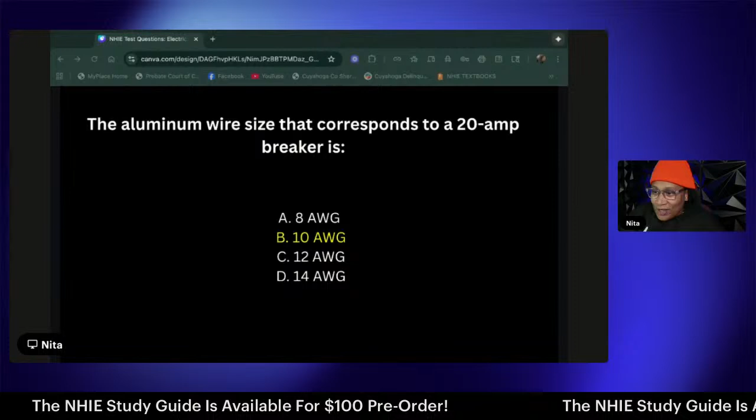First answer, Megan. Correct answer is B. Point to Megan. Everybody got that right, nicely done. All right, next question.

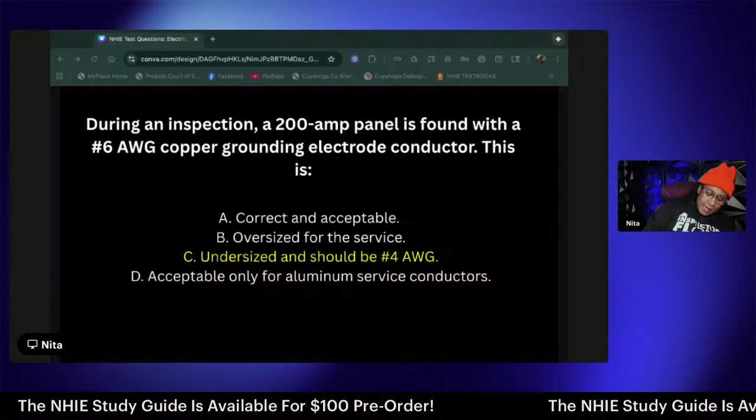First answer, Cola says B, Miss Sims says A, C says C, Megan says A. C, correct answer is C. Point goes to C with the correct answer, C. Tennessee, stand up. All right, next question.

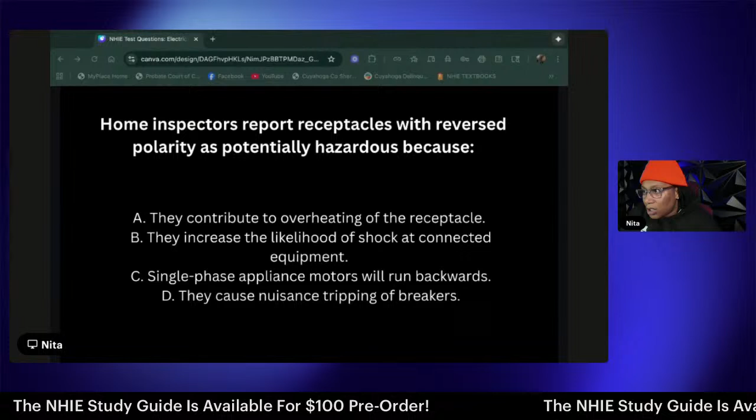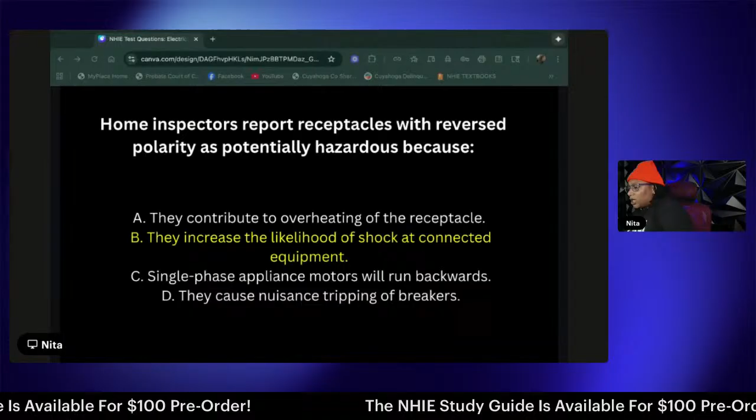First answer was Megan. B, B, B, B, everybody says B. B is the correct answer. That's 3 points for Megan. Next question.

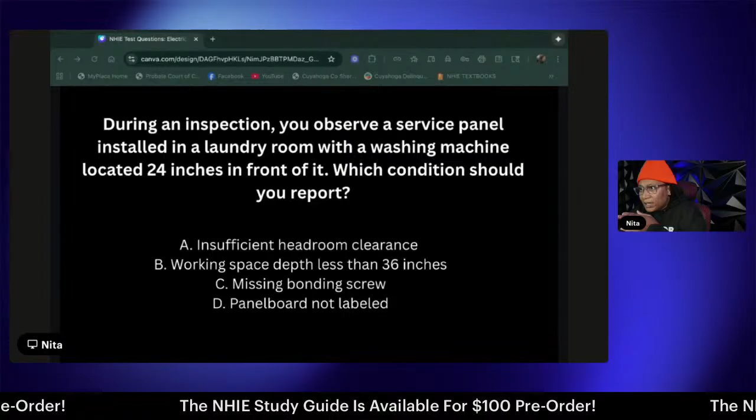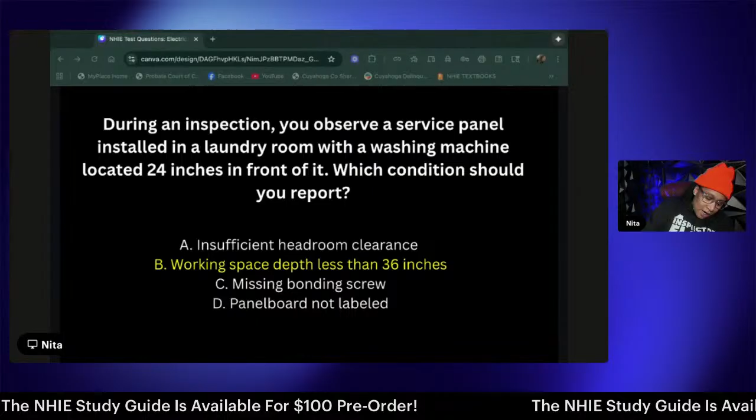First answer C, she says A. Is she correct? C says B, wait yeah. I said A, oh wait, I'm getting confused, let me scroll down. Did you change it? Oh no, A, here it is. Okay, A, and then Cola was second with B. And so the correct answer is B, that's point to Cola. Delaware in the house tonight.

All right, let me see who's last. Okay, Philip last. Next question.

Thank you, Lamont, I appreciate that. First answer, Luis with A. Megan says B, C says A, Dakota says D, Miss Sim says B. The correct answer is B. Has to be within 3 feet of the sink edge.

Point to Megan. Uh-oh, Megan's running away with this thing. That's 4 for the girl in Oregon. All right, next question.

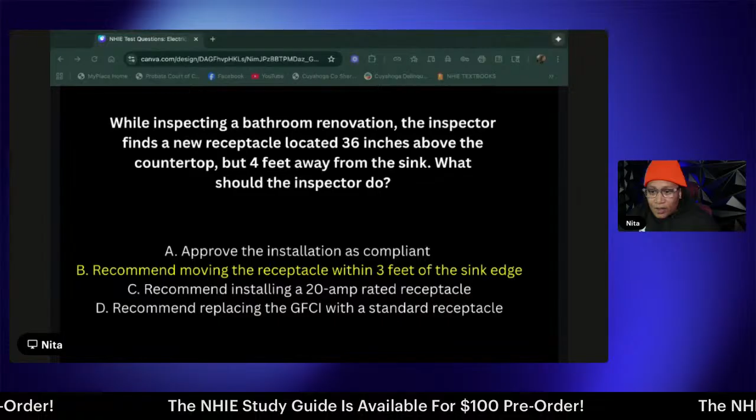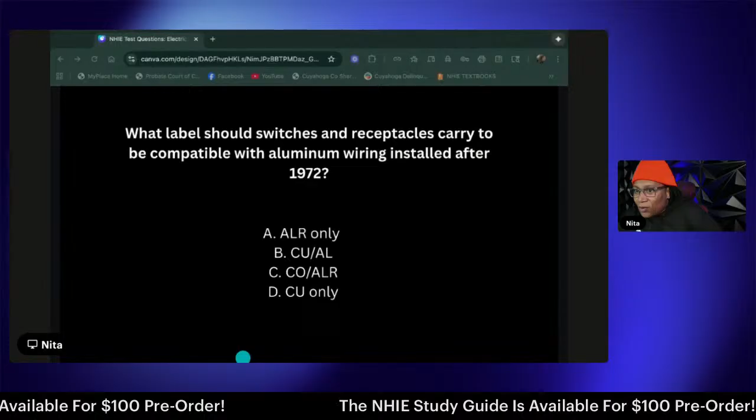First answer, Louise says A. Then Cola says C, Miss Sims says B, C says D, Bree says C. Correct answer is C. Remember, you saw this the other day.

So who does that point go to? C? No, it don't go to me. Who says C first? Oh, my bad, that's Cola. My bad. Cola, okay, okay. All right, next question.

Let me see who was last. I got Megan as the last answer. Next question.

Translate and eliminate. It doesn't do any good to get it done first if it's not right. What are they asking? What can I eliminate?

First answer, Cola. Correct answer is C. Solid strand aluminum versus stranded aluminum. Correct answer C, point goes to C. Every correct answer C get is C.

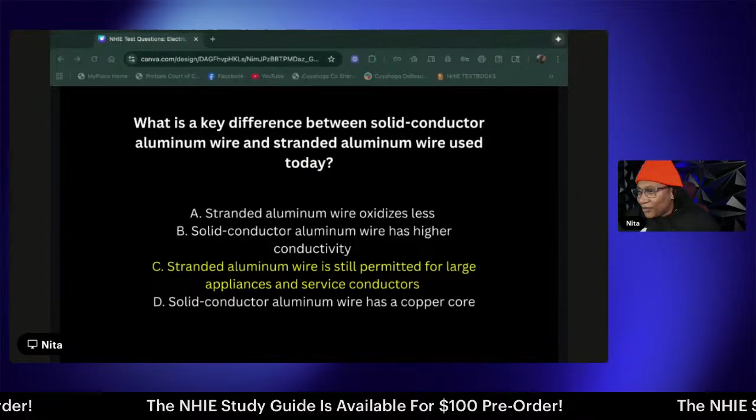All right, next question, let me see who's last. Philip with C. Okay, next question.

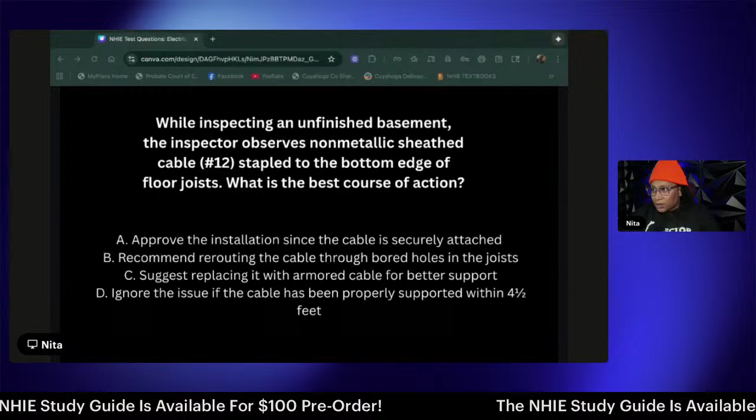First answer, Megan. Correct answer is B, nicely done. Everybody got that one right, way to go. However, the point goes to Megan.

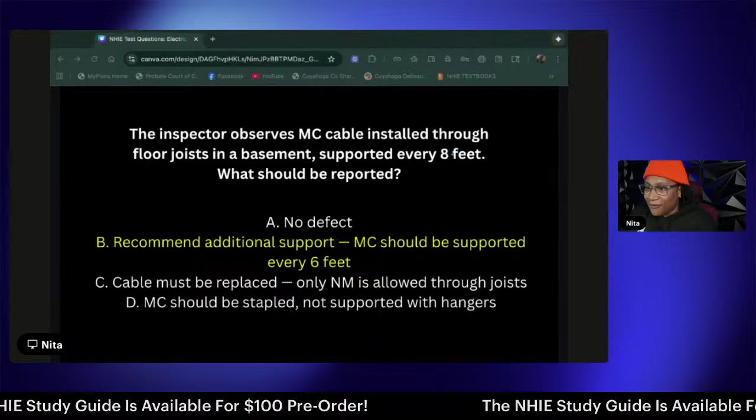Point goes to Cola. Megan has 5, Cola has 3, C has 2, Luis has 1. We've got about 5 minutes left. Next question.

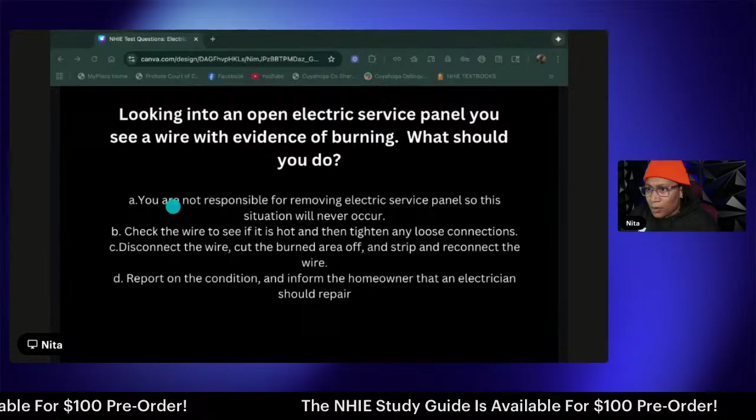First answer, cola. Correct answer is D, cola. Those are the analysis type of questions that you got, right? Yes, yeah. All right, next question.

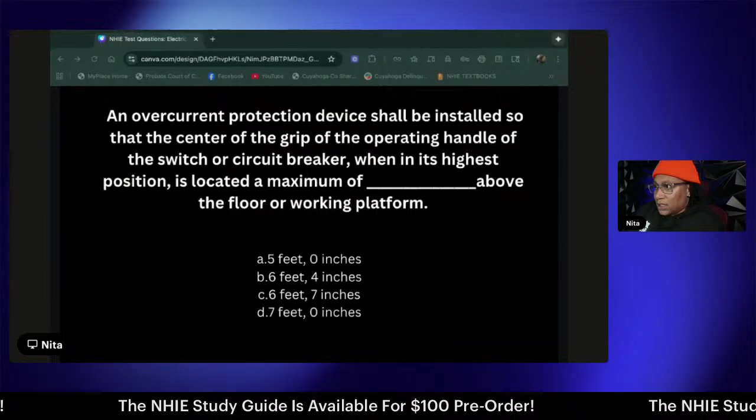First answer, Cola says B, Megan says C, Louise says C, C says A, Miss Sim says C. The correct answer is, in fact, C. So that point goes to Megan. Nicely done, everybody who got that right. All right, next question.

All right, next question. Translate. First answer, Luis says C.

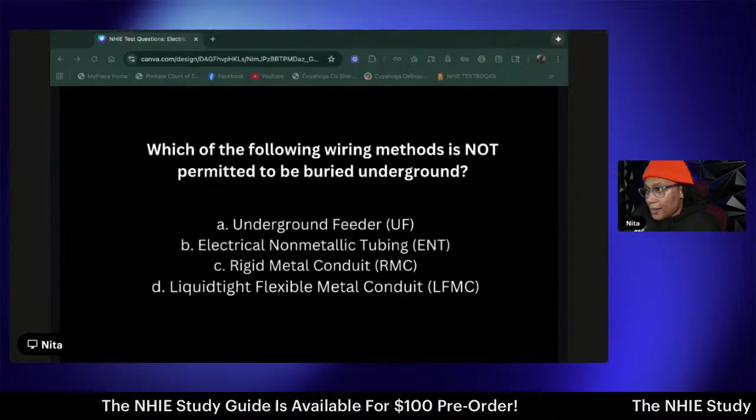Philip, I'm assuming you meant B. Okay, yeah, B. Cola says D. Correct answer is B. Point to Philip. Okay, California knows how to party. Philip is on the board, baby. All right, next question.

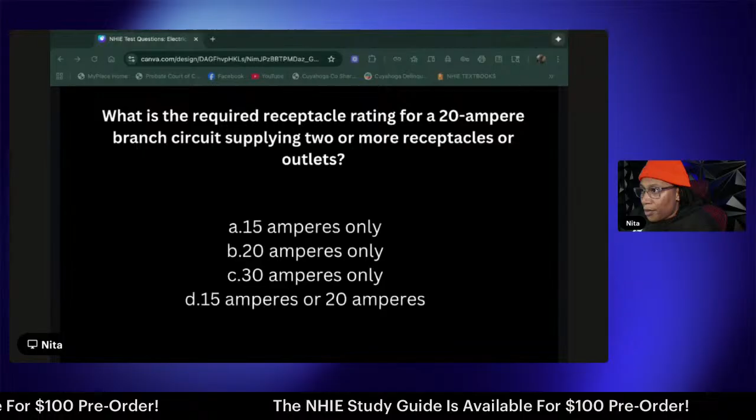First answer, Cola says B. C says C. Philip says B. Megan says D. The correct answer is D.

Who's that point go to? The answers came in too fast. Is that Megan? Megan. It's Megan. And then we're done with the timer too.

What is the required receptacle rating for a 20 amp supplying 2 or more receptacles or outlets? Well, really, all of your general receptacle circuits could be 15 or 20, just depending upon what's housed on that actual circuit. That's the only thing to me that, as far as the question would apply. Any branch circuit, for a 20 amp branch circuit, the outlets could be 15 or 20 amps. Because 15 is less than the 20, so the 15 amp receptacle would still work with the 20 amp circuit breaker because it's still less than the 20 amps that it's rated for. You just wouldn't want to go over for that particular circuit.

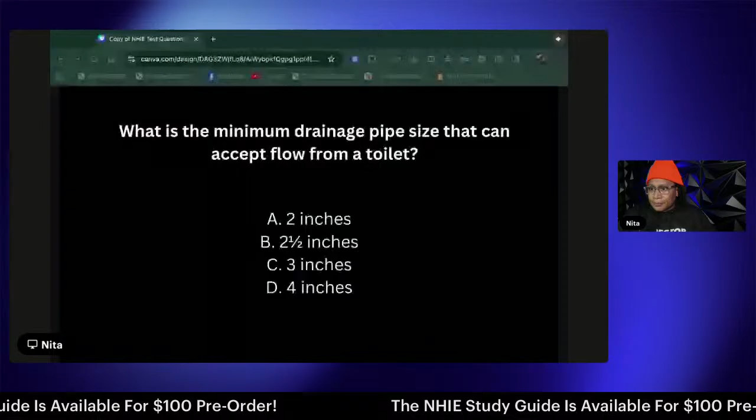Minimum drainage pipe size that can accept flow from a toilet. Correct answer is C. Minimum.

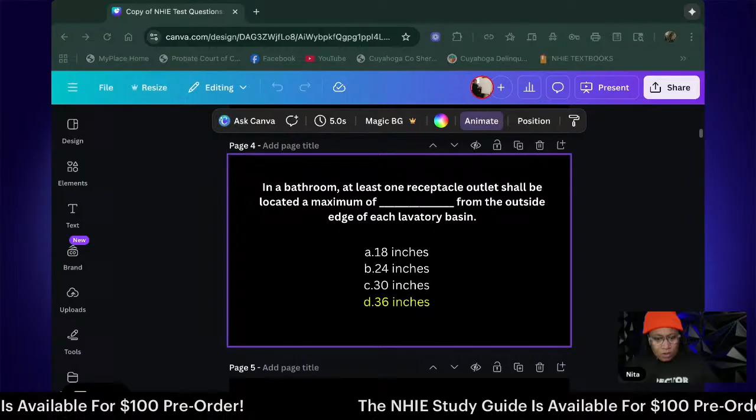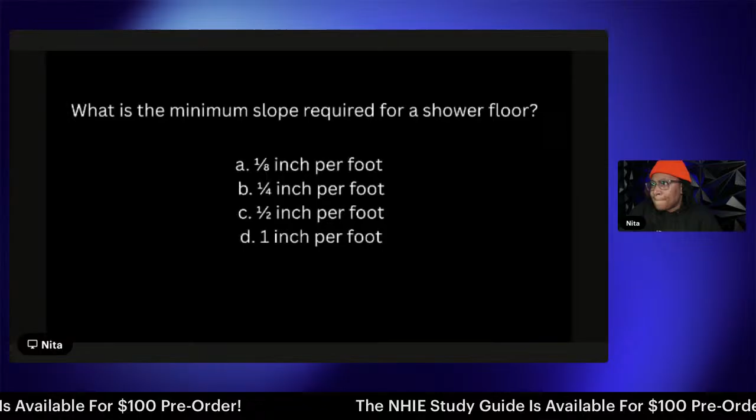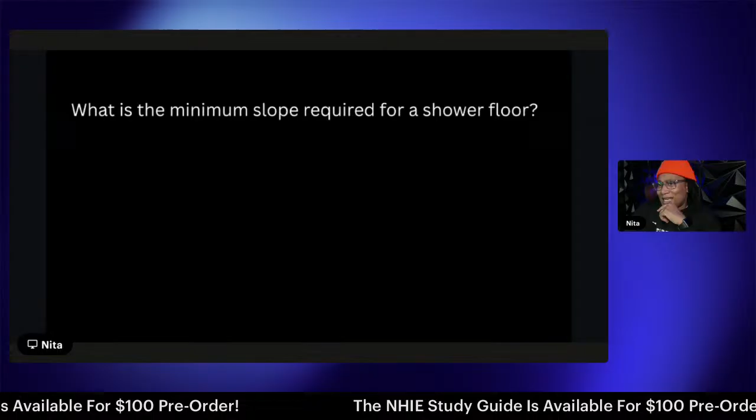What's our correct answer? Correct answer is B, minimum slope required. Minimum slope, all right, next question.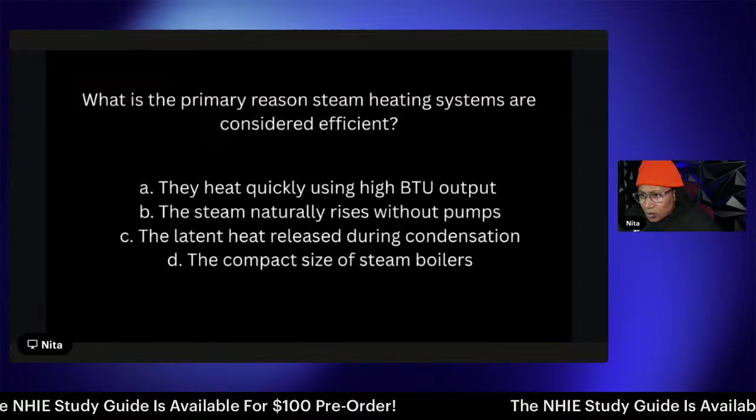Translate, then eliminate, and choose the best answer. Correct answer is C. For some reason I don't have the answer slide for that one. Next question.

Correct answer is, in fact, C. Nicely done. Next question.

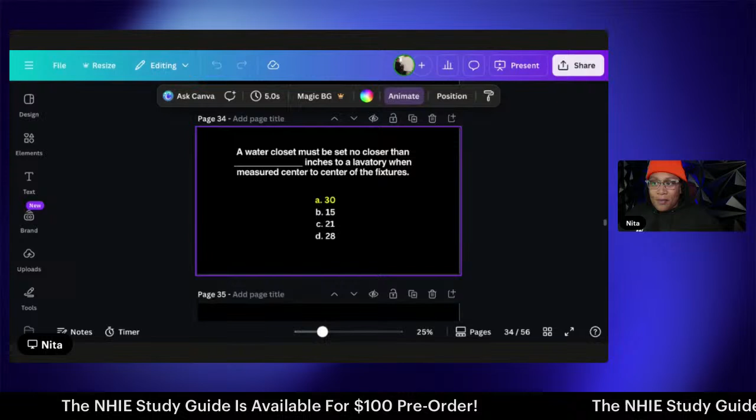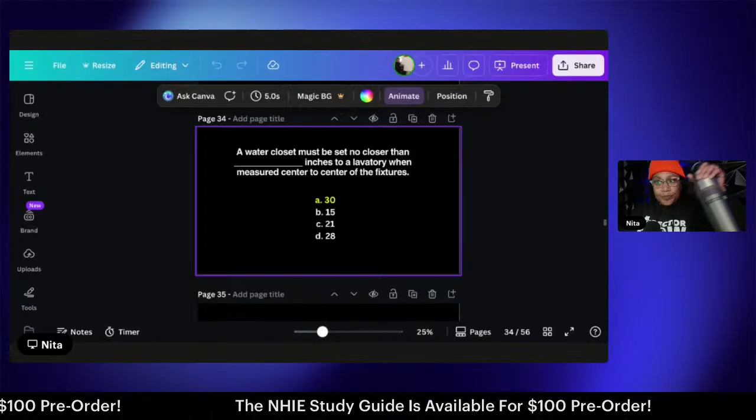One more thing: when you get a home inspection to be performed, let's say the homeowner or whoever hosts the property signed a contract, are they really enforced to be there, or let's just say the brother-in-law is going to be on site with you?

How would you answer that contract question? Is there something the brother-in-law needs to sign? Let's say the real person that brought you the job is not around, but they have a family member around. Are they going to be responsible to sign the report? How would you handle that scenario?

You mean as far as a test answer or like in real life? I think it was a test answer, but for me, I think my real life answer was what I gave, and I think I might be wrong. But the test answer was more looking for, is it compulsory for the brother-in-law to sign the contract?

That sounds like one of those questions I just talked about that relates to agency. An agent—no, nobody else can sign for the client. The client has to sign themselves because that is who you are establishing the agreement with. From a test taking perspective, and then from a real life perspective, that would not happen because I would not be showing up unless I had the pre-inspection agreement signed by the client. Now I don't care who shows up to the inspection, but my agreement, my contract, is with the client, and that is who would need to sign.

Anything else on the professional responsibilities? That's one reason why you want to have them sign. You want all of that stuff, the signing and the money, taken care of before you even show up. In my opinion, I don't want to be conducting that type of administrative business while I'm there to do the inspection. That part needs to be taken care of prior to. I don't even feel like I'm booked for an inspection unless I have payment as well as the pre-inspection agreement signed. It's just, to me, a better practice.

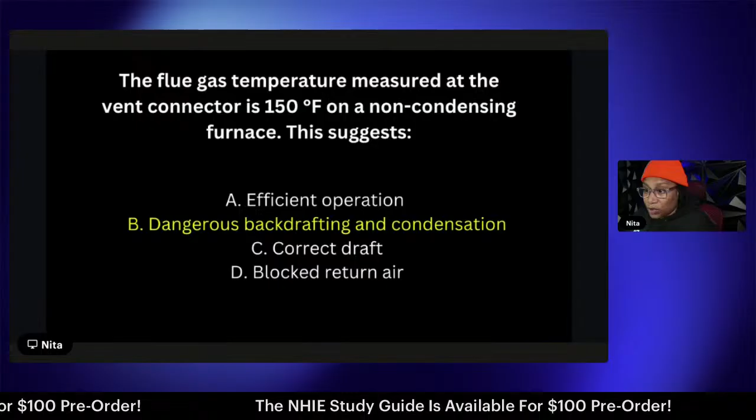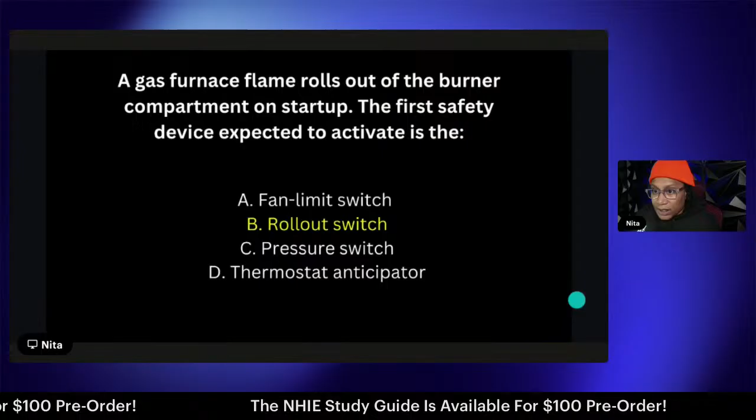Next question. Correct answer is B, nicely done. Next question.

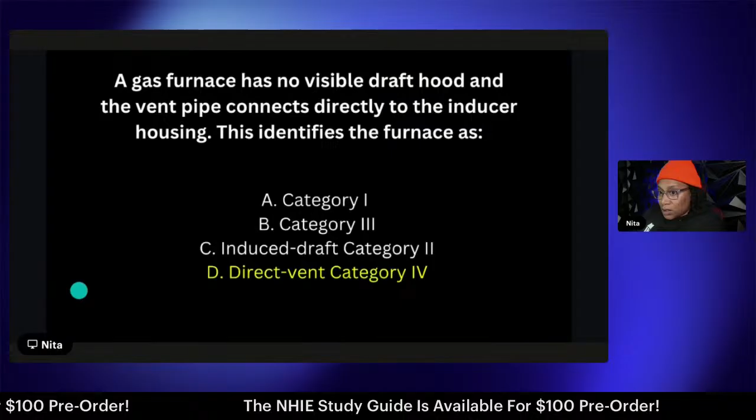Correct answer is D, direct vent, nicely done. Next question.

I want you to translate. Think about this: a mini split system. As soon as you say split system, I know I've got a condenser outside, an evaporator coil inside. So now you're saying I have an indoor wall mounted unit that is dripping water. Okay, cool. Now what can I eliminate?

Which one? A? Yeah, okay. Is there anything else I can eliminate? The compressor, D, I would agree. Okay, so I've eliminated A and D. I'm now down to B and C.

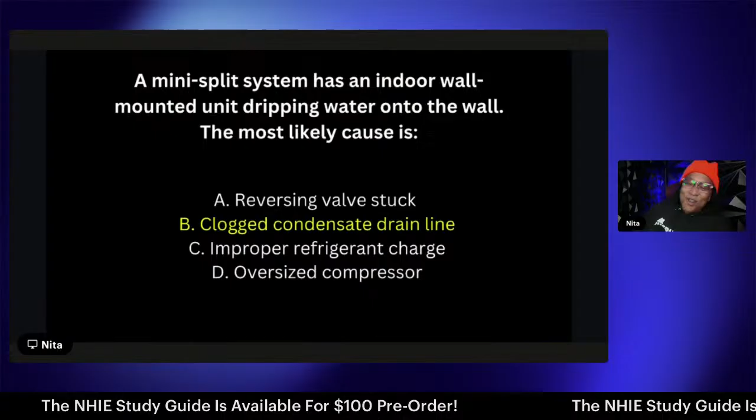Okay, do you see how when we slow down and translated, we thought about the question and what they were talking about, how you eliminated the answer? That is how this process works for you. That was a perfect example of how it works in your favor if you do it. Because once you understand the question, even if you thought it was D, I'm eliminating now with my understanding, my translation of the question, I'm eliminating D as even being an option.

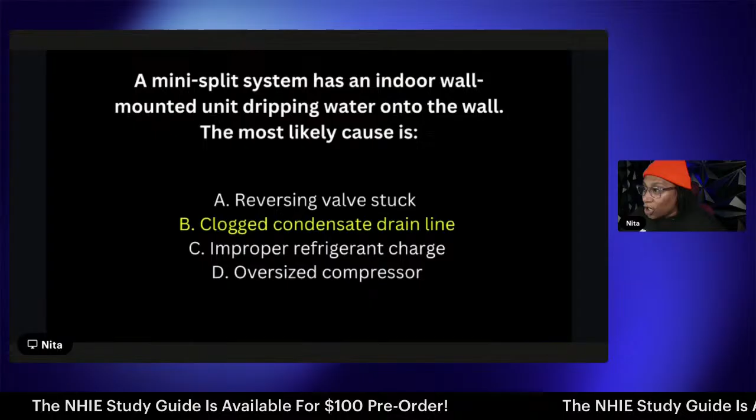Even if you didn't know the complete answer, when they say split system, did your mind auto-check: okay, I got my condenser outside, and even if I didn't know what it was on the inside, I got something on the inside because I remember that from split system. Dripping water, so condensation, even if you didn't know the correct answer. I thought that too, I was like condensation, dripping water, and I was like, well, I don't know. But this is why you should be eliminating first before you're trying to choose the correct answer.

I'm telling you, it works. Even if you know 1000% the answer is correct, it does nothing but serve as a way to check. So once you answer those, I don't need to go back through those 200 questions and check and make sure I eliminated and my answer was still standing. I'm going with that answer because it remained after I eliminated, after I understood the question. Either you eliminate your way to the correct answer or you eliminate your way to confirming the answer you thought was correct. Either way, it benefits you.

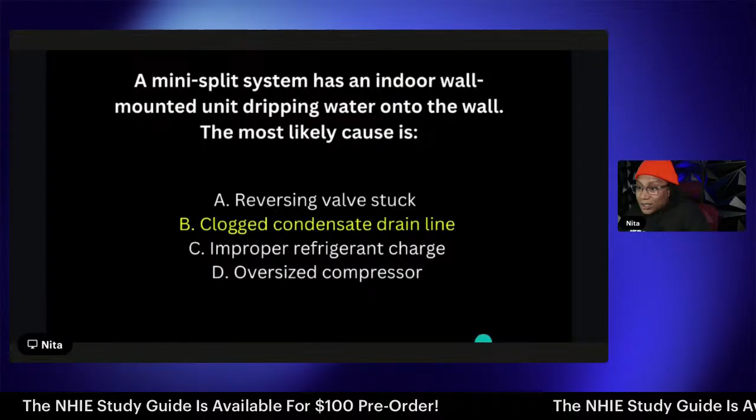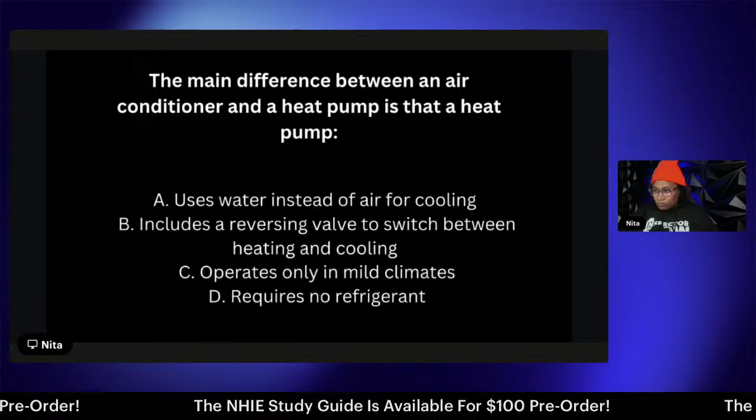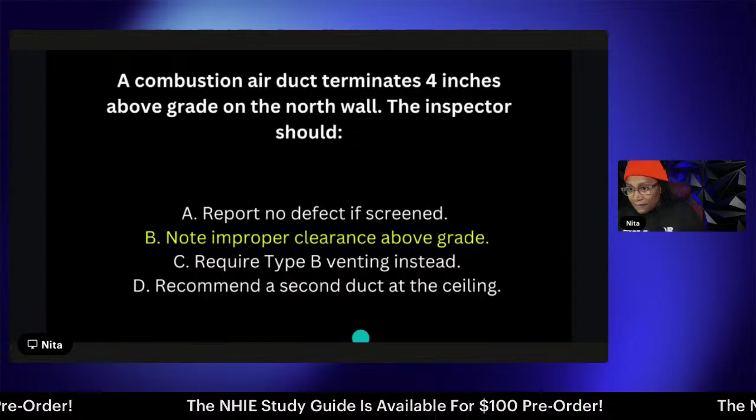Next question. Nicely done, correct answer is B. Next question. Correct answer. Nicely done, correct answer is B. Next question. Nicely done, correct answer is B.

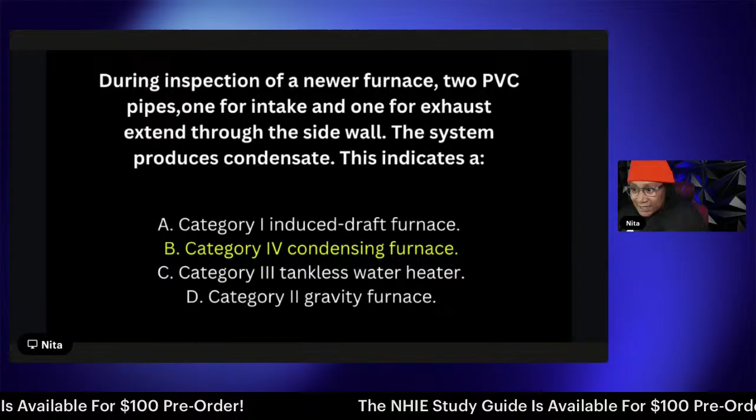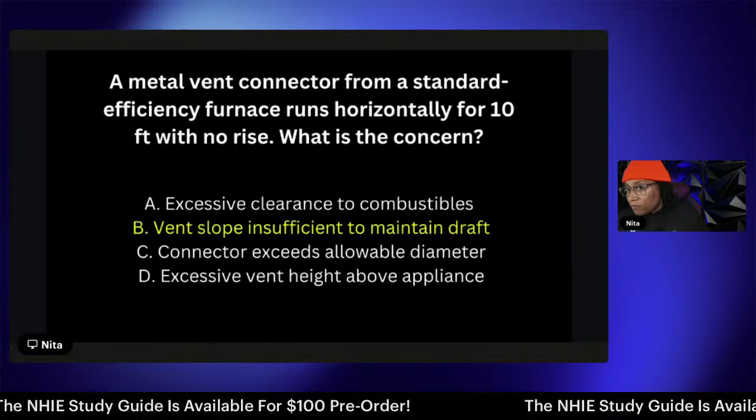Category 4, condensing. Next question. Correct answer is B, a metal vent connector, standard efficiency. What am I thinking? Metal vent, standard efficiency, what type of furnace is that? Category 1. And which type of category 1? Induced draft. Correct, induced draft. Okay, and that's why the connector running for so long is not good.

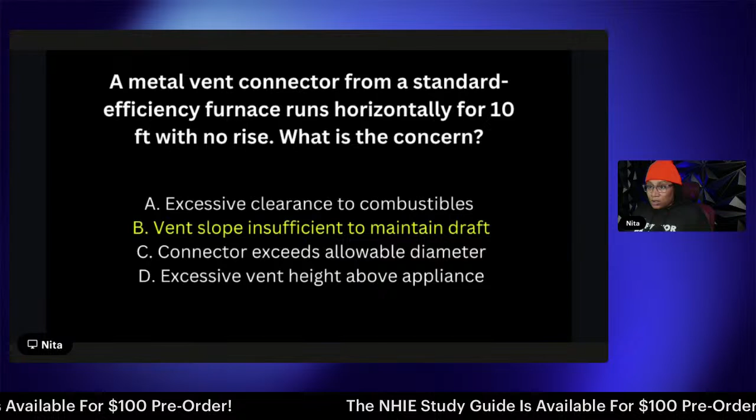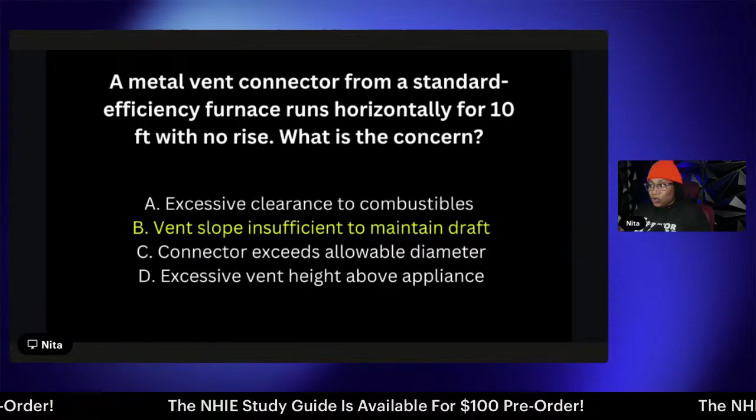Okay, remember that question: the vent gas temperature is 300 degrees. By the time it runs 10 feet, the vent gas temperature will be cooling and we will have condensation. No bueno.

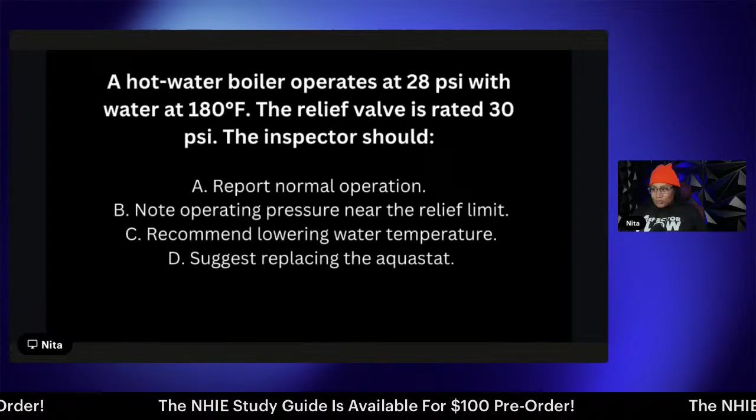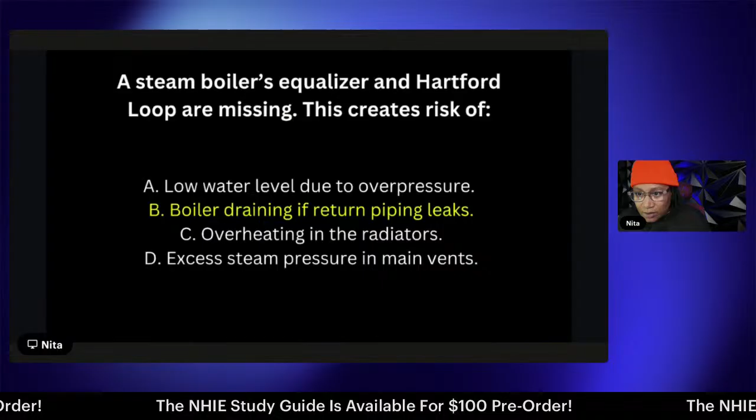Yeah, please go over those sections, you can't have these areas as blind spots. Correct answer is B. Good job, all right, next question. It's already answered, I haven't shown it yet. Yeah, I'm seeing it too. I just saw it, oh okay.

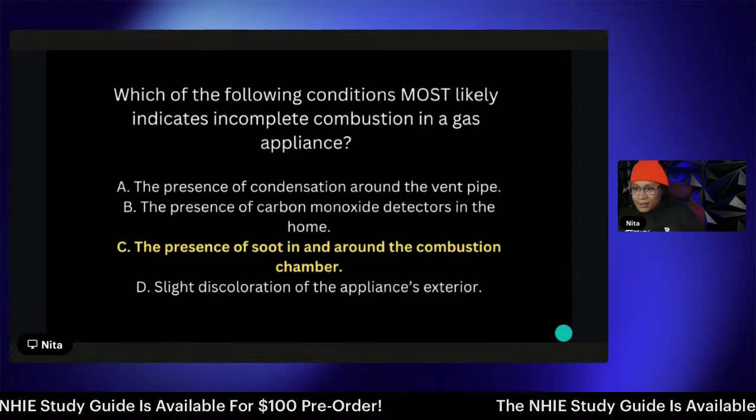Eliminate, eliminate. What you got, Bree? Correct answer C. Most likely indicates. B, yes it's true, but most likely. Next question.

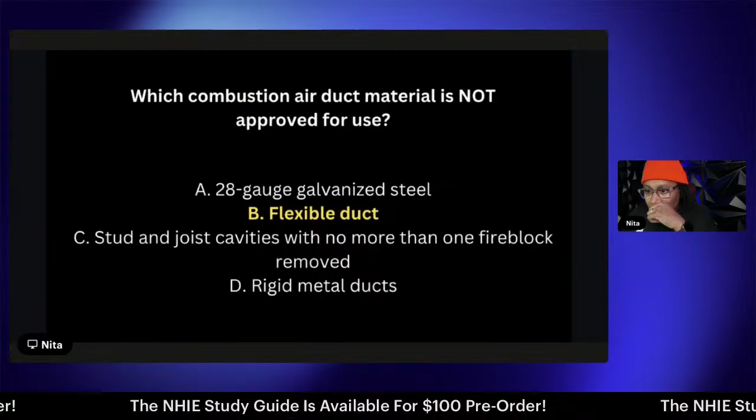Combustion air duct. Correct answer is B, flexible duct, not for our combustion air. Oh, all right, let me go that one. Oops. Next question.